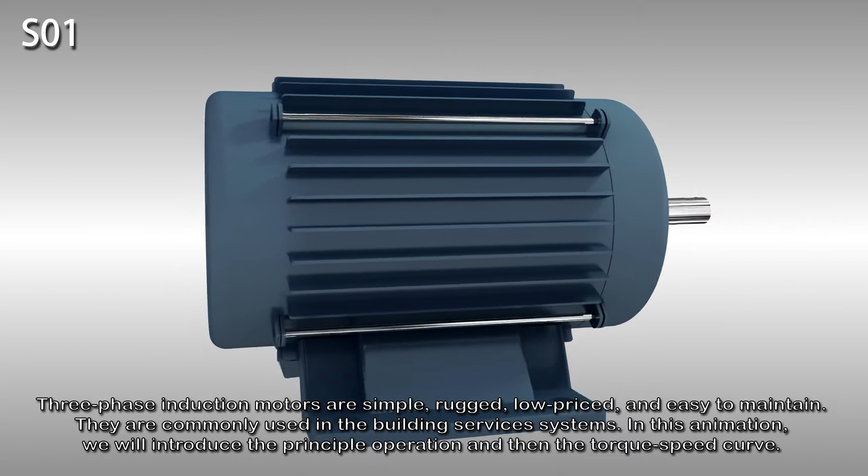Induction motor, principle of operation and the torque speed curve. Three-phase induction motors are simple, rugged, low-priced and easy to maintain. They are commonly used in building services systems. In this animation, we will introduce the principle of operation and then the torque speed curve.

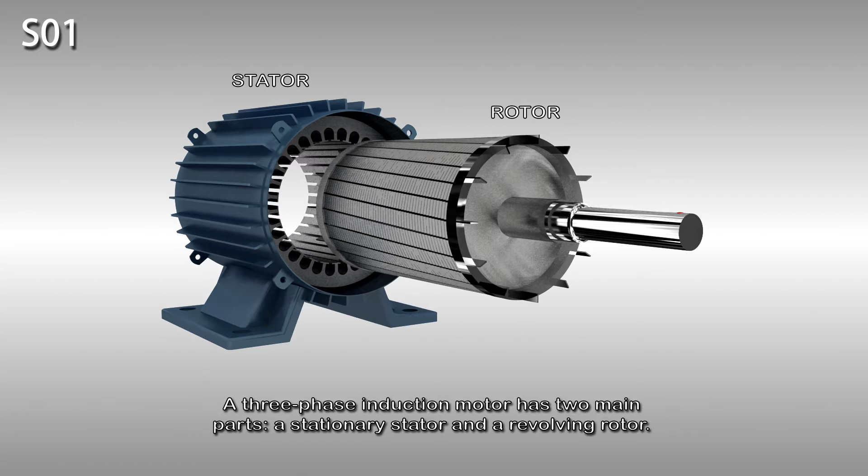A three-phase induction motor has two main parts, a stationary stator and a revolving rotor. The stator consists of a steel frame that supports a hollow cylindrical core made up of stacked laminations. A number of evenly spaced slots punched out of the internal circumference of the laminations provide the space for the stator winding. The rotor is also composed of punched laminations.

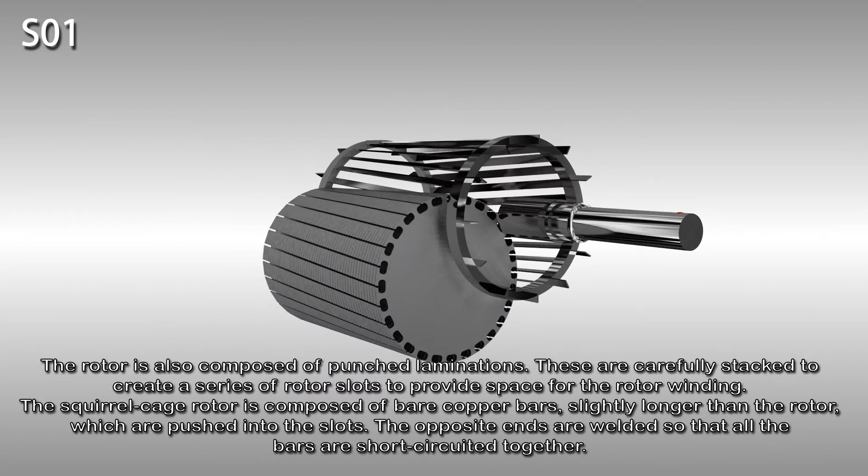These are carefully stacked to create a series of rotor slots that provide space for the rotor winding. The squirrel cage rotor is composed of bare copper bars, slightly longer than the rotor, which are pushed into the slots. The opposite ends are welded so that all the bars are short-circuited together. The entire construction resembles a squirrel cage, from which the name is derived.

When a three-phase AC current passes through the stator winding, it produces a magnetic field that rotates in time with the AC oscillations and penetrates the rotor. The rotor will start to rotate in the direction of the rotating stator magnetic field based upon the application of Faraday's law and the Lorentz force on a conductor.

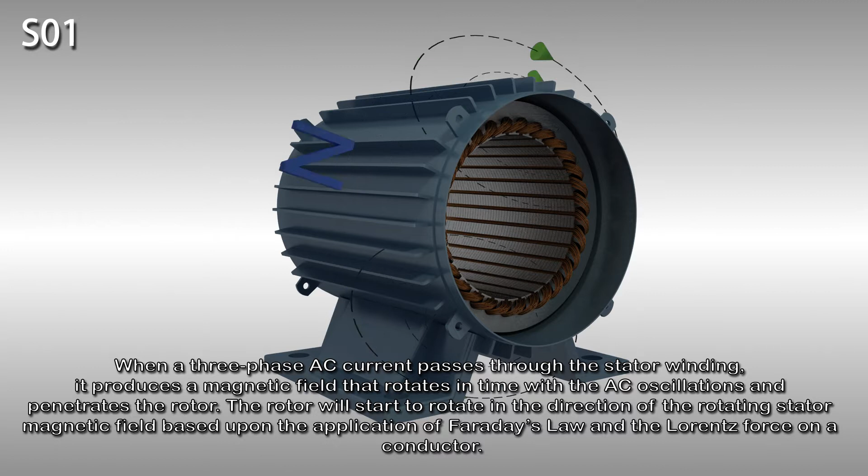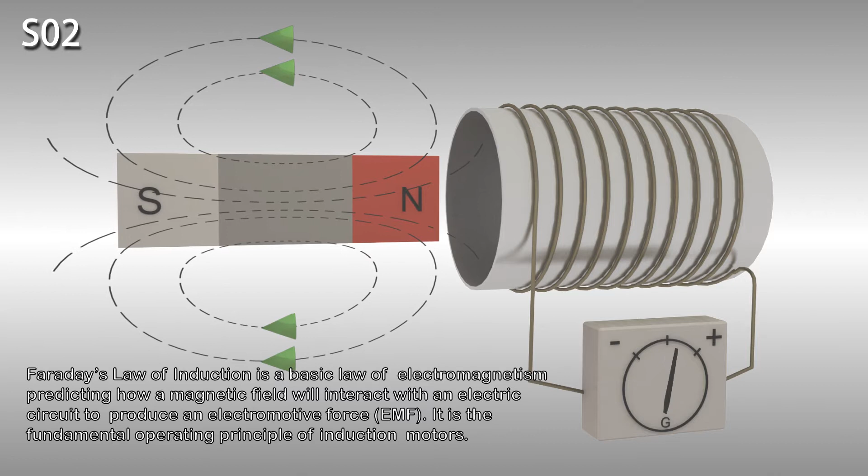Faraday's law of induction is a basic law of electromagnetism and predicts how a magnetic field will interact with an electric circuit to produce an electromotive force, or EMF. It is the fundamental operating principle of induction motors. In 1831, Michael Faraday discovered that any change in the magnetic environment of a coil of wire will cause an EMF to be induced in the coil.

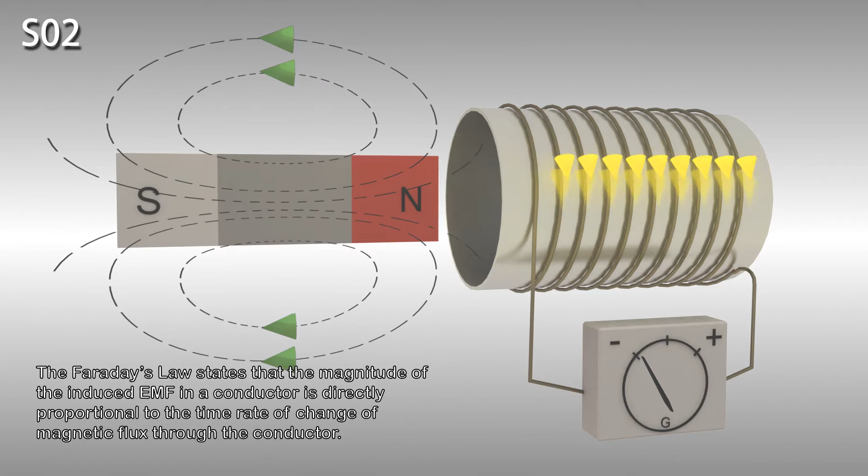Faraday's law states that the magnitude of the induced EMF in a conductor is directly proportional to the time rate of change of magnetic flux through the conductor. In other words, EMF is proportional to ΔΦ/Δt. Lenz's law is a qualitative law that refers to the direction of induced current in relation to the effect which produces it, without quantitatively relating their magnitudes. It states that the direction of the induced current will always oppose the inducing action of a moving magnet.

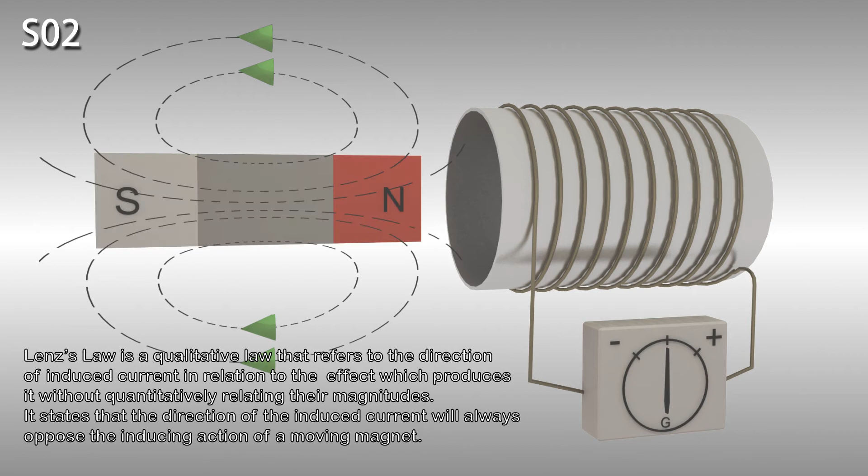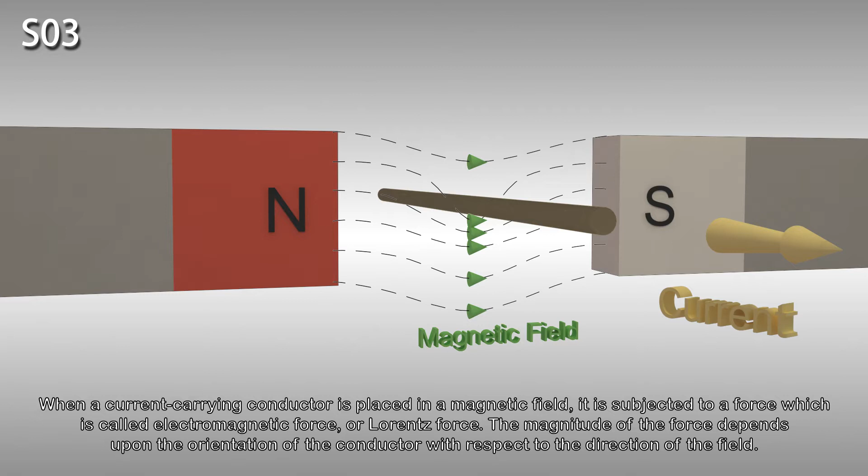When a current-carrying conductor is placed in a magnetic field, it is subjected to a force called the electromagnetic force, or Lorentz force. The magnitude of the force depends upon the orientation of the conductor with respect to the direction of the field. The force is greatest when the conductor is perpendicular to the field and zero when it is parallel to it. Between these two extremes, the force has intermediate values. The direction of the electromagnetic force can be illustrated by Fleming's left-hand rule.

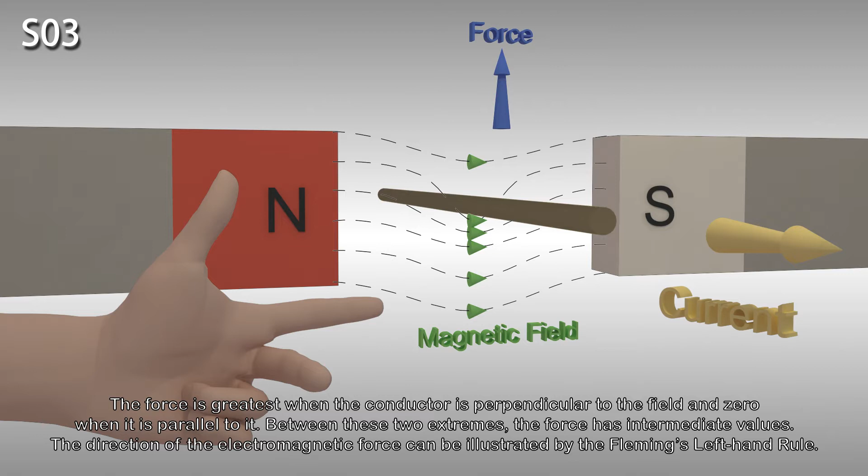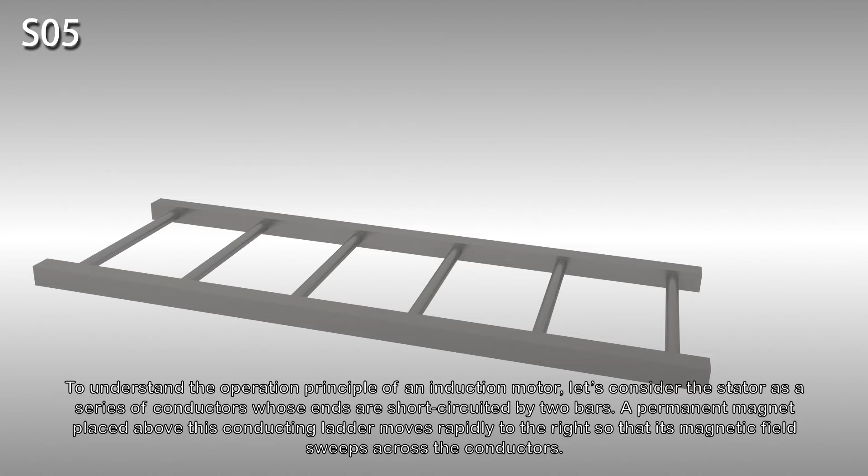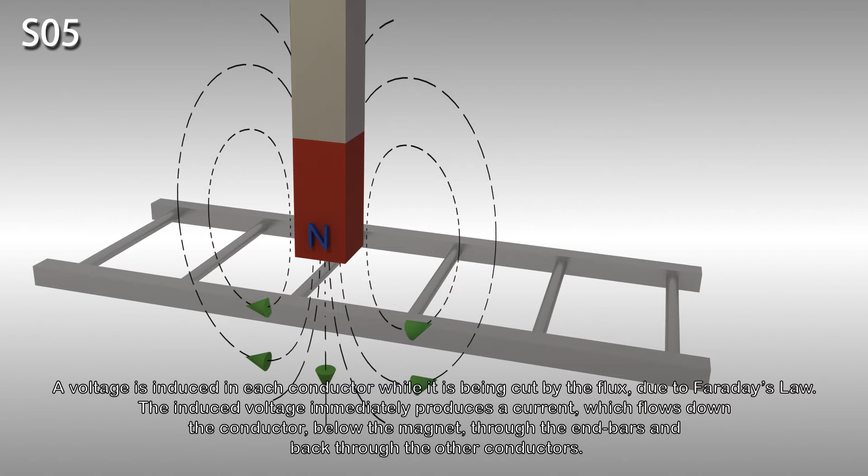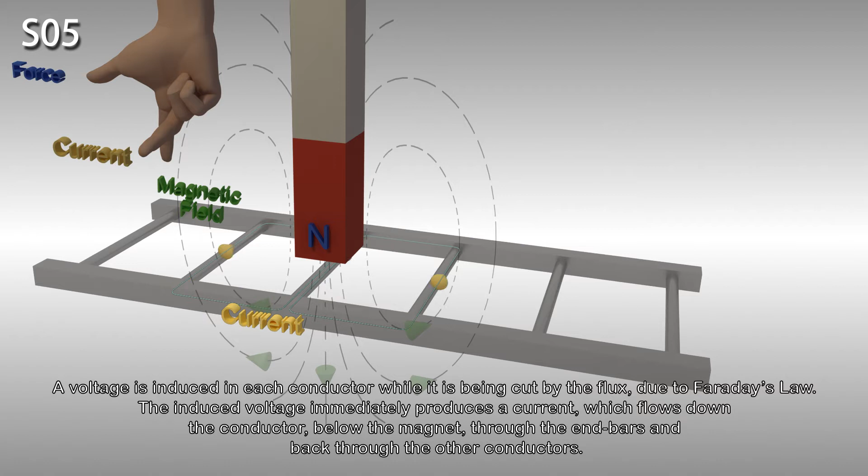To understand the operation principle of an induction motor, let's consider the stator as a series of conductors whose ends are short-circuited by two bars. A permanent magnet placed above this conducting ladder moves rapidly to the right so that its magnetic field sweeps across the conductors. A voltage is induced in each conductor while it is being cut by the flux due to Faraday's law. The induced voltage immediately produces a current which flows down the conductor, below the magnet, through the end bars and back through the other conductors.

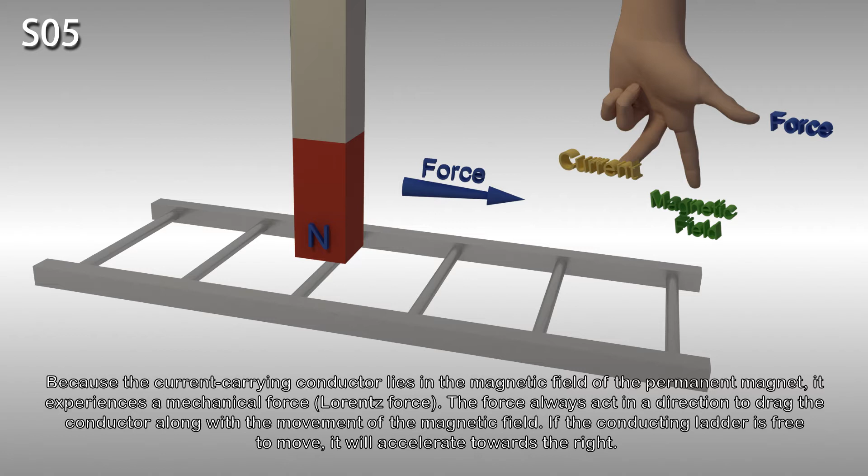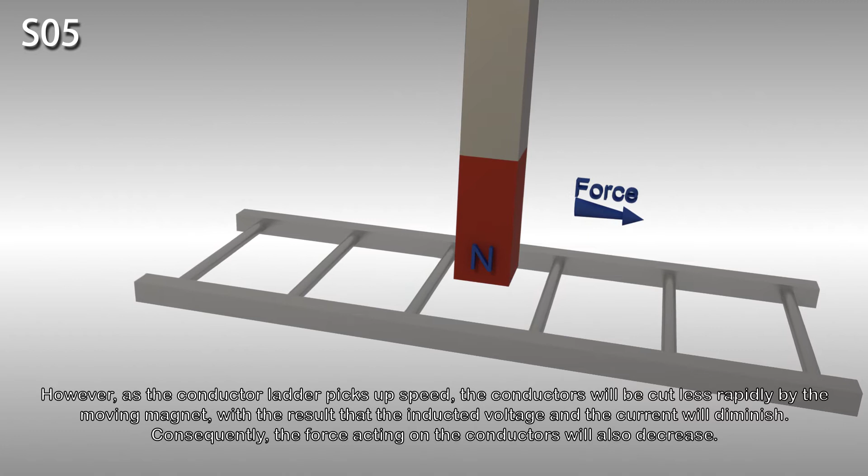Because the current-carrying conductor lies in the magnetic field of the permanent magnet, it experiences a mechanical force known as the Lorentz force. The force always acts in a direction to drag the conductor along with the movement of the magnetic field. If the conducting ladder is free to move, it will accelerate towards the right. However, as the conductor ladder picks up speed, the conductors will be cut less rapidly by the moving magnet, with the result that the induced voltage and the current will diminish. Consequently, the force acting on the conductors will also decrease.

In an induction motor, the ladder is curved to form a squirrel cage, and the moving magnet is replaced by a rotating field. The field is produced by the three-phase currents that flow in the stator windings.

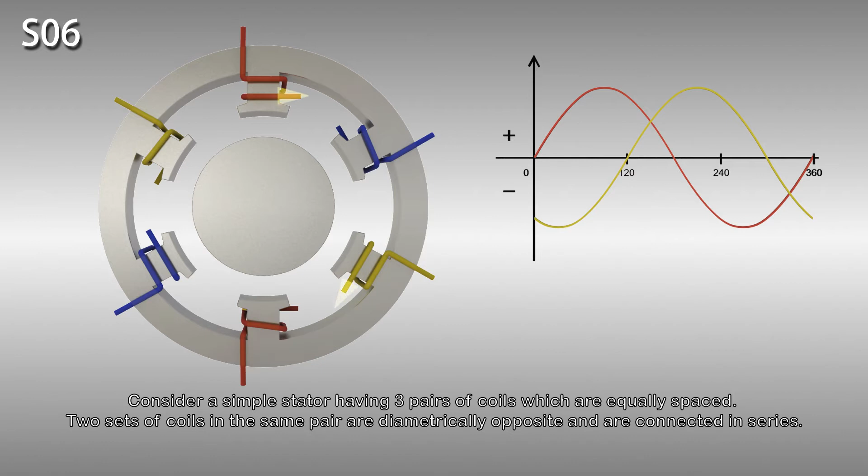The animation now explains the rotating stator magnetic field. Consider a simple stator having three pairs of coils which are equally spaced. Two sets of coils in the same pair are diametrically opposite and are connected in series. This creates three identical sets of windings that are mechanically spaced at 120 degrees relative to each other.

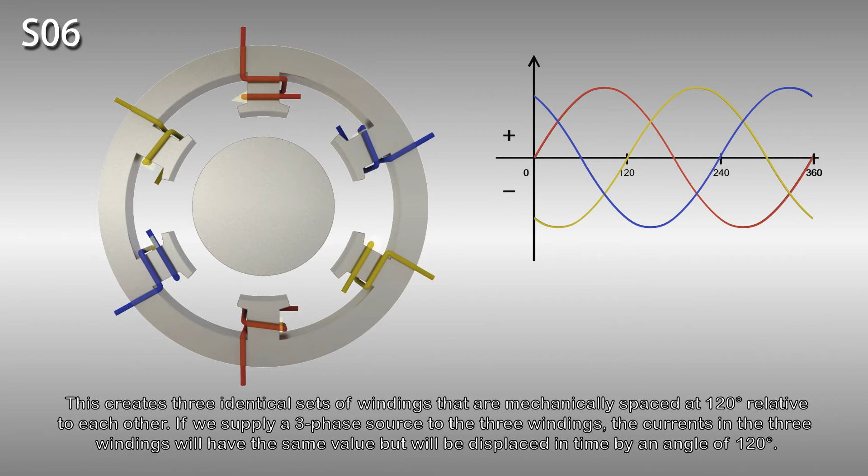If we supply a three-phase source to the three windings, the currents in the three windings will have the same value, but will be displaced in time by an angle of 120 degrees. During the positive half cycle of the R phase, the current will flow in this direction along these two windings. According to the right-hand rule, the magnetic flux is in the direction shown, creating north and south poles.

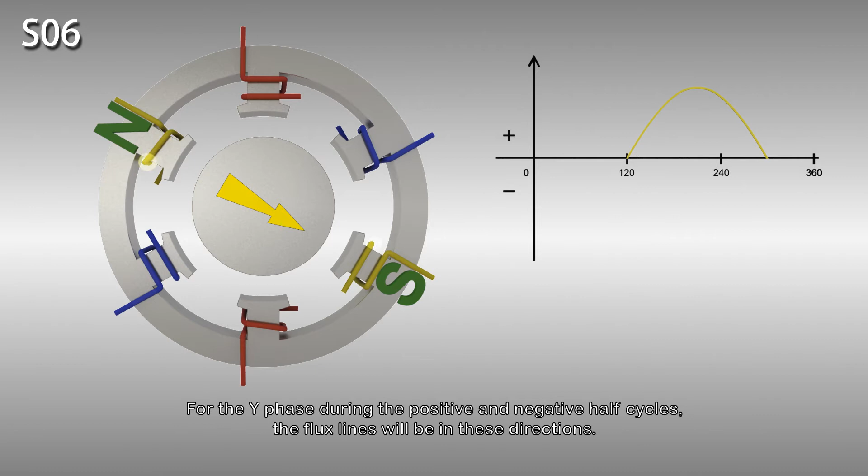In the negative half cycle, current will be flowing in the opposite direction. Therefore, the flux lines will also be in the opposite direction. For the Y phase during the positive and negative half cycles, the flux lines will be in these directions. For the B phase during the positive and negative half cycles, the flux lines will be in these directions.

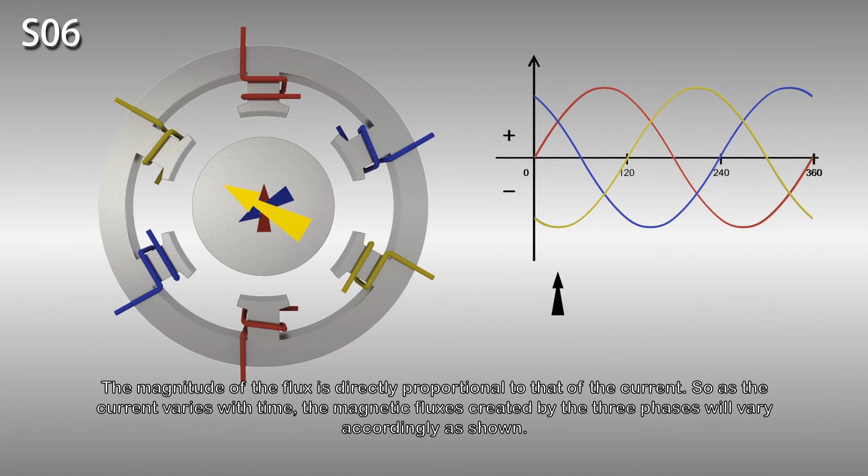The magnitude of the flux is directly proportional to that of the current. As the current varies with time, the magnetic fluxes created by the three phases will vary accordingly as shown. As flux lines can't cross each other, the three fluxes combine and produce a magnetic field having essentially one broad north pole and one broad south pole. This means this stator produces a two-pole field.

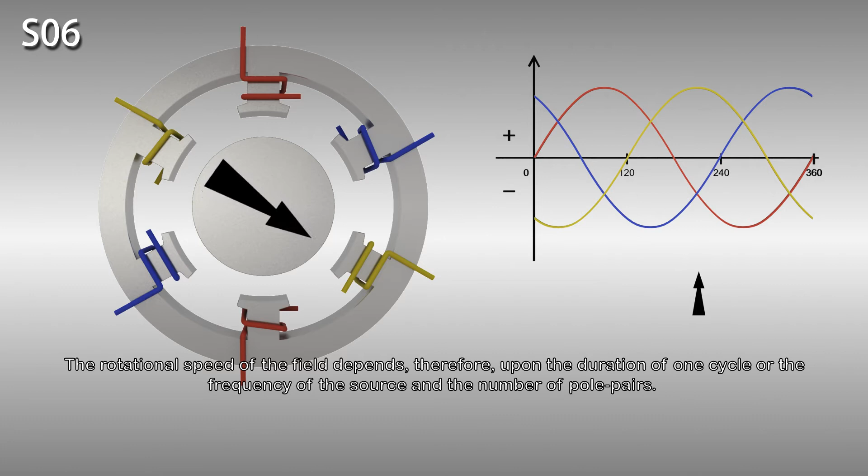The magnetic field rotates with time and makes one complete turn in one cycle of current flow. The rotational speed of the field depends therefore upon the duration of one cycle or the frequency of the source and the number of pole pairs. Because the speed of the rotating field is necessarily synchronized with the frequency of the source, it is called synchronous speed. If the frequency is 50 Hz, the resulting field makes one turn in 1/50th of a second, that is 3000 revolutions per minute. The synchronous speed can be reduced by increasing the number of pole pairs.

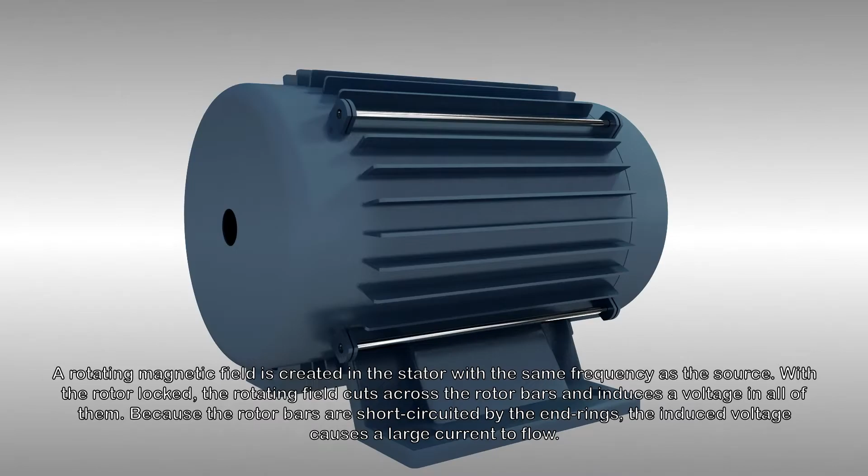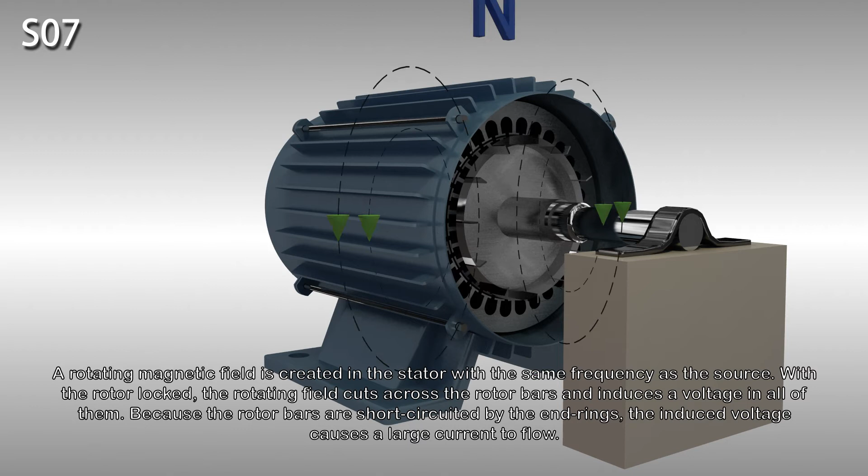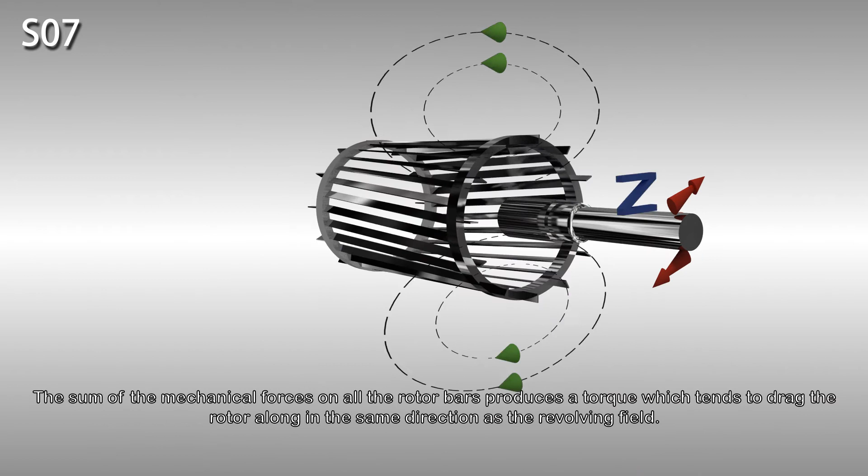A rotating magnetic field is created in the stator with the same frequency as the source. With the rotor locked, the rotating field cuts across the rotor bars and induces a voltage in all of them. Because the rotor bars are short-circuited by the end-rings, the induced voltage causes a large current to flow. The current-carrying conductors are in the path of the flux created by the stator. Consequently, they all experience a strong mechanical force. The sum of the mechanical forces on all the rotor bars produces a torque which tends to drag the rotor along in the same direction as the revolving field.

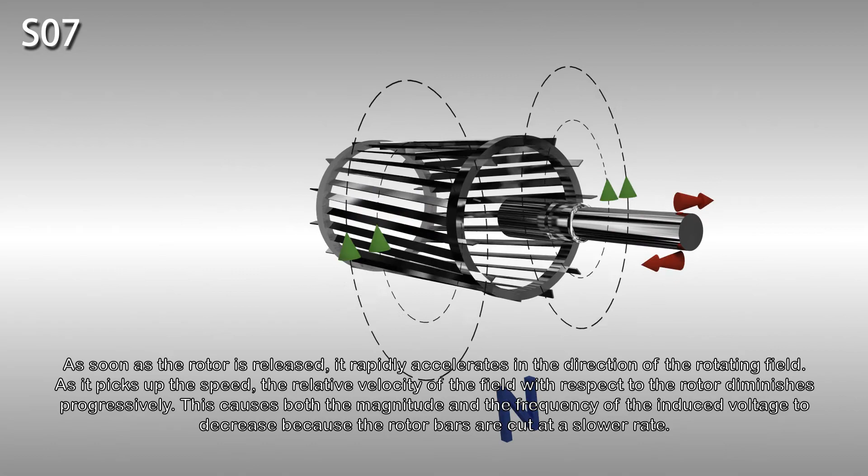As soon as the rotor is released, it rapidly accelerates in the direction of the rotating field. As it picks up speed, the relative velocity of the field with respect to the rotor diminishes progressively. This causes both the magnitude and the frequency of the induced voltage to decrease because the rotor bars are cut at a slower rate. As the rotor speeds up, it never manages to catch up with the revolving field.

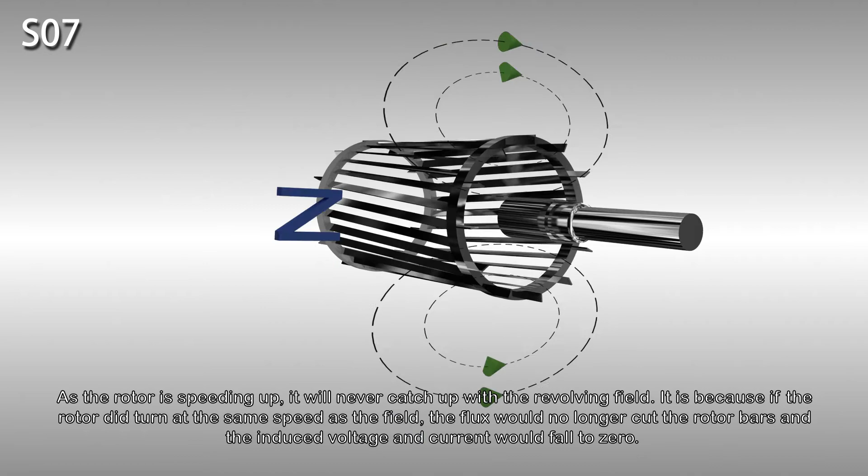If the rotor did turn at the same speed as the field, the flux would no longer cut the rotor bars and the induced voltage and current would fall to zero. Under these conditions, the force acting on the rotor bars would also become zero, and friction and windage would immediately cause the rotor to slow down. The rotor speed is always slightly less than the synchronous speed in order to produce a current in the rotor bars large enough to overcome the braking torque. The difference between the synchronous speed and the rotor speed, expressed as a percentage of synchronous speed, is called the slip S.

The torque developed by a motor depends upon its speed. Their relationship cannot be expressed by a simple equation. Instead, a torque-speed curve is usually used to show the relationship. When a motor starts to rotate from rest, a locked rotor torque or breakaway torque is developed. It is usually larger than the full load torque.

As the motor starts up, the torque reduces slightly until the pull-up torque is developed as the motor speeds up. The torque continues to increase to the breakdown torque as the motor runs faster and faster. This is the peak torque that can be developed by the motor. As the motor goes through the breakdown torque and its speed continues to increase, the torque drops. As the rotor speed approaches the synchronous speed, the torque becomes zero.